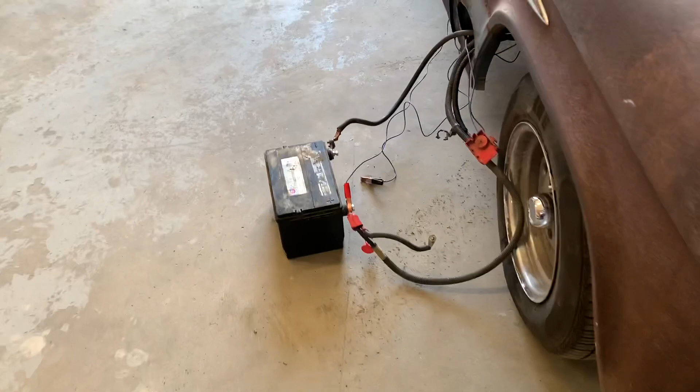I've picked up the tune a couple times, just figured out a couple things. But I just want to do a walk around on what I did, because I didn't skip things, but I was running out of time and I didn't have time to go in depth with it. So what I have is I've got battery cables hooked up to the battery out here. And inside of here I got my fuel cell.

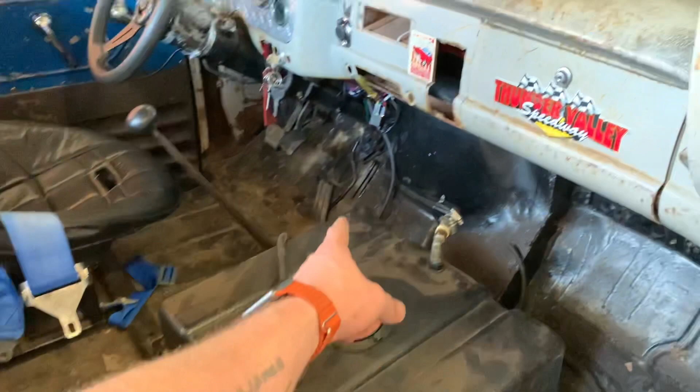Here is a Bosch 044 pump. I'm gonna be running two of these, but for now just idling, one is fine. And here's one of the Evil Energy fuel filters. Comes out of the tank, into the filter and the pump, out to the engine. Now this is very temporary, obviously. And I've got two wires running just outside of here to the battery.

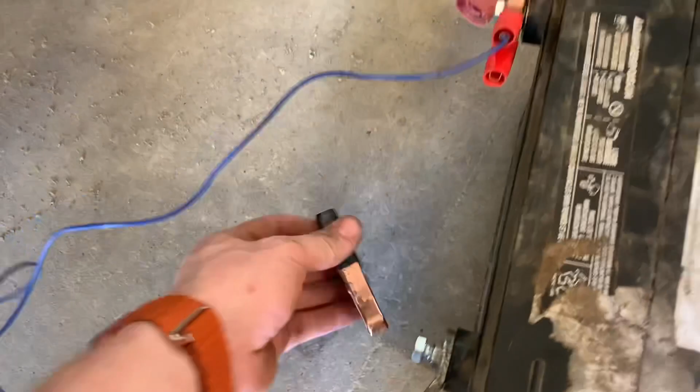And the pump is on a separate, you know, you can hear that. And this is the return here. This is a rollover valve, which only allows air in. It doesn't allow fumes back out, so there's no worries about anything in there. It's just to get it running.

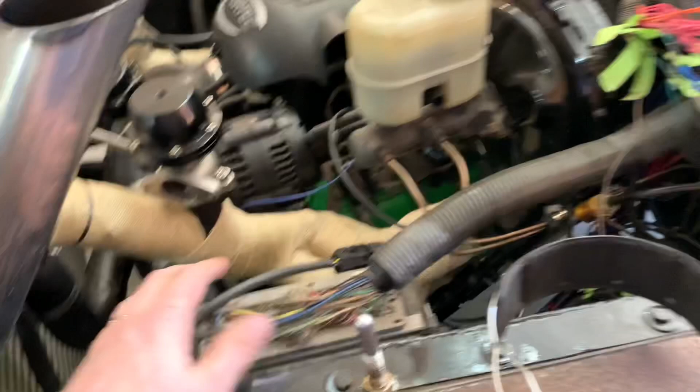And this is the main battery cables, of course, with a distribution wire there going up to the PCM and everything. And the PCM is very temporarily wired in, just two wires to the ignition, and then this one here is to the hot over on the battery. And this is my wideband going into the EGR, so I can log the wideband, which is hooked up right here in the exhaust. And PCM is bolted on, wideband's hooked up.

So I'm just getting to put in the tune here now. I'm reading off the tune because this is my old laptop and my new one is dead and I forgot to bring the cord. So we're gonna go Destroked 6.0. And I'm just going to save that one here. So we're just going to look at the tune a little bit here.

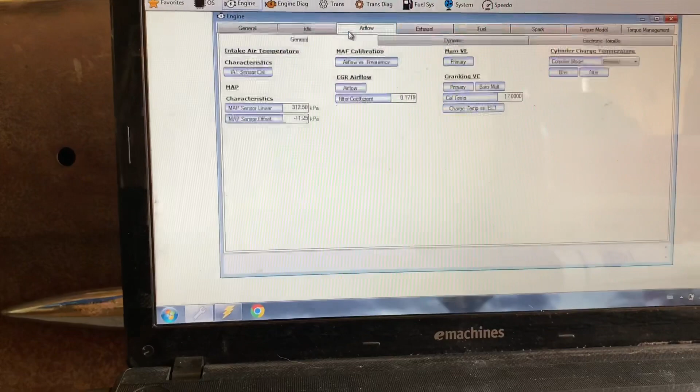I've got the map sensor calibrated. The calibration on the map sensor was wrong. I had 329 point something kPa and like -8 for the offset, and apparently those values were wrong for this map sensor, so I fixed that. That helped a lot. Into my VE, I pulled a bunch of fuel out. This is up around the 50s, but right now I'm still idling in the 70-75 kPa range, up around 800. So I still got a bit too much fuel here.

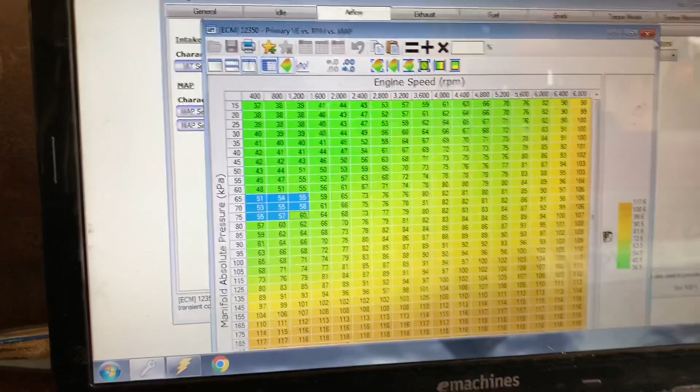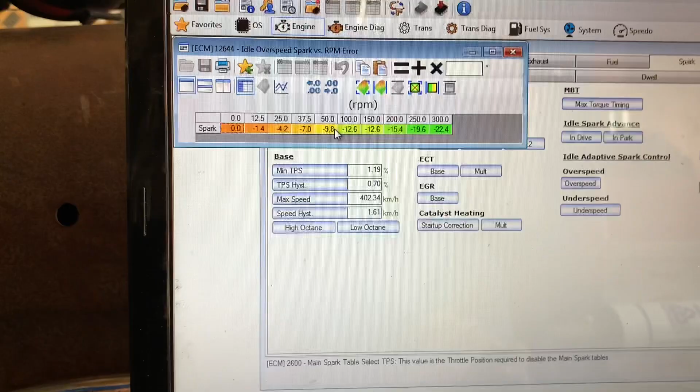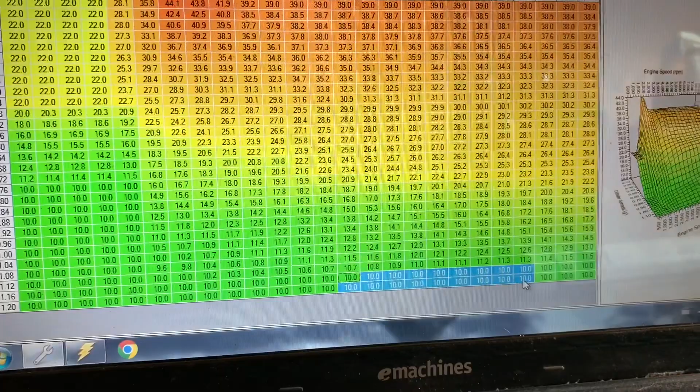What else we got? Of course, power enrichment is done, and I'll be up into like 11.6, 11.5, 11.7 I think. But that's up in the boost. I haven't obviously got up there yet. As for spark, I have my underspeed and overspeed adjusted, so I get a bit more of a crazy idle, and it idles absolutely nuts. My max timing is 10 degrees, because I've always had bad luck with pump gas, anything over 10, 11, 12 degrees, bad luck as in breaking pistons.

So let's get it running and see how it sounds, and see if I can tune it a little bit. This is mostly going to be an idle tuning video, going over some stuff that I have coming. I still have to put back brakes on this thing. I still got to rewire the whole truck, because all the wiring has to be completely changed out. I used a Chev truck fuse block before and it was an absolute mess, and I want to tidy that up. In behind the gauges is a rat's nest. I want to improve it a lot. So there's a lot of that stuff going.

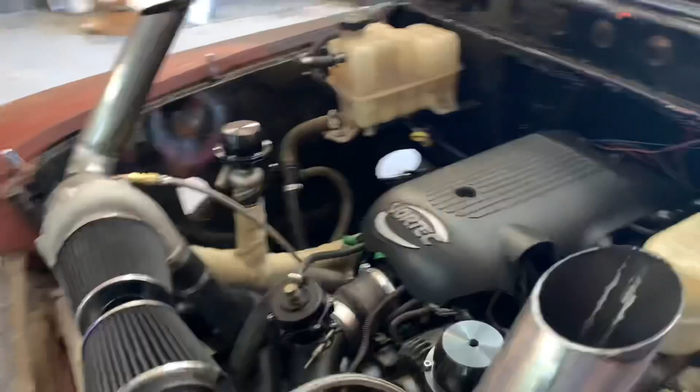What else did I do? I got the coolant, all that done. I think you guys saw that. This is the intercooler piping that I made. It isn't what you call pretty, but it does work very well. I've got the coolant bottle up here in the front with a cap on it.

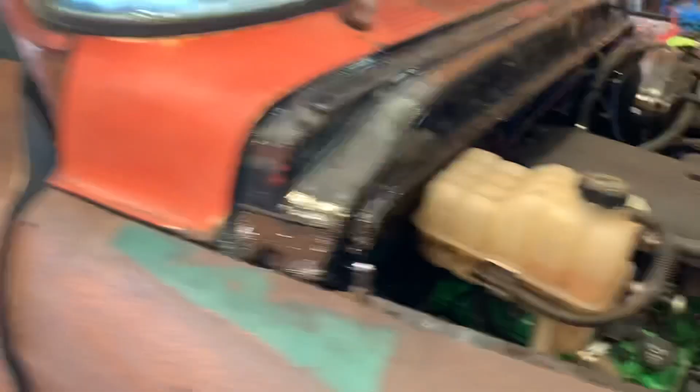And in the back here, I also have a radiator, and this one's cool because it's a van radiator. Came out of a 3/4 ton van, and it also has a cap. So I don't think there'll be any issues running two radiator caps. It'll help me bleed this way better, because I always had air trapped up in the rad. And I'd have the truck up like 4 feet in the air on the ramp here, which is pretty sketchy in itself, trying to get air to come from the rad up to the engine, and that sucked.

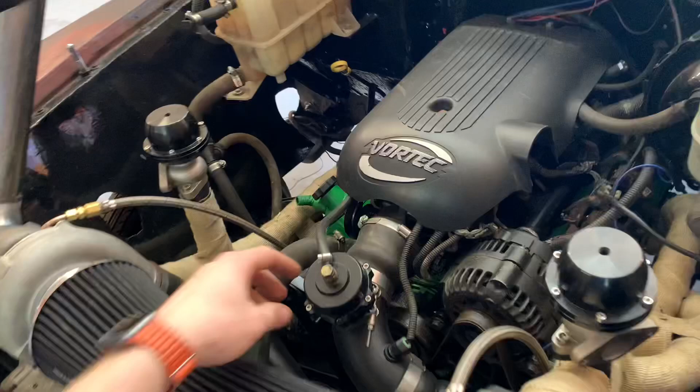So I haven't really heard this blow off valve yet, and I have no idea what it sounds like. I don't know if it's making enough vacuum to open it the way it's idling. So let's get it running and see how it sounds initially.

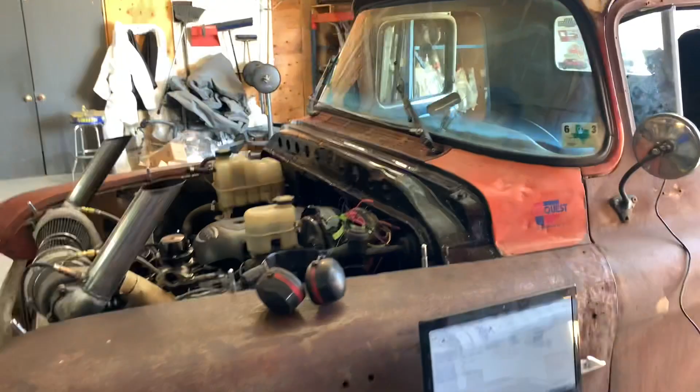First of all, I ain't doing nothing without these, because this thing is loud. Which apparently, after you put a cam in one of these, they get loud.

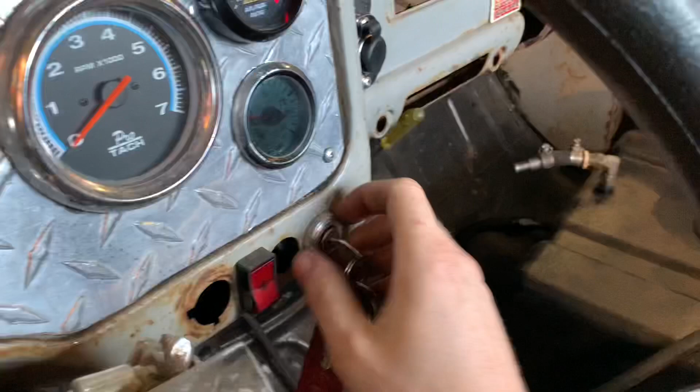All right, so the fuel pump is on. It's just circulating, doing its own thing. I think the key is actually on, so it should read fine. All right, that's good. Oh, that's good. It starts so well.

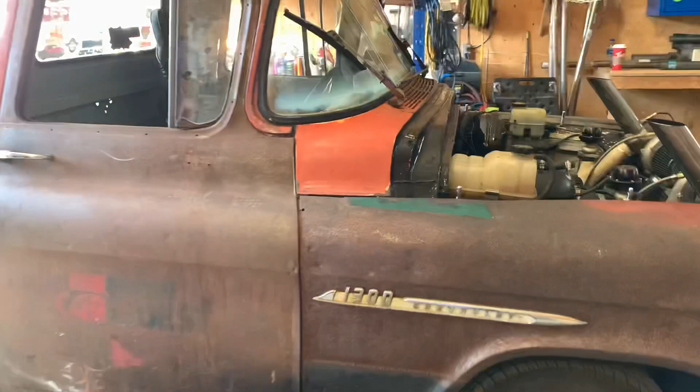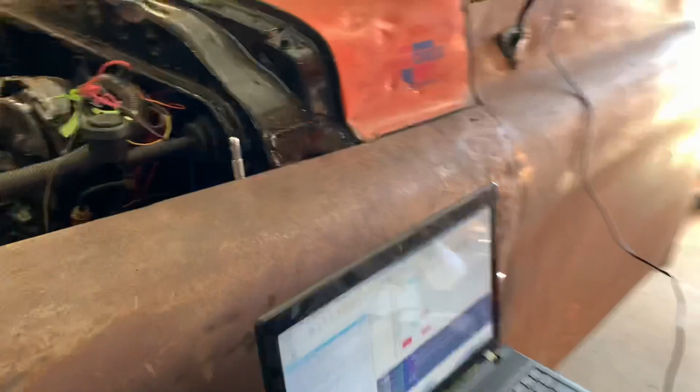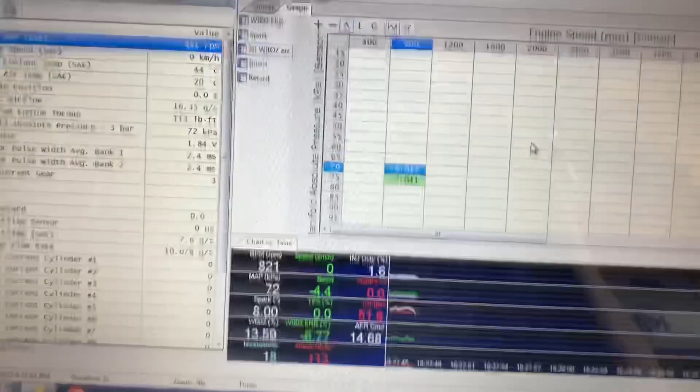Sometimes I get this really lean reading, so I just shut it off, start a new log, and now we're off around 5-6% range, so that's not too bad. 0 spark retard, and we're idling at 72 kPa, which is still too high, but we're right on our RPM range. I'm sorry if I'm yelling, but I really can't hear myself.

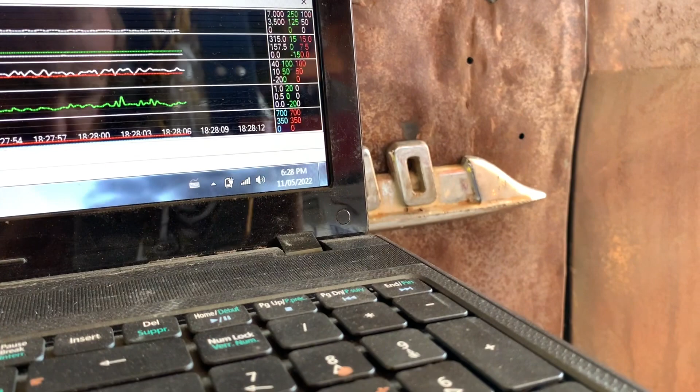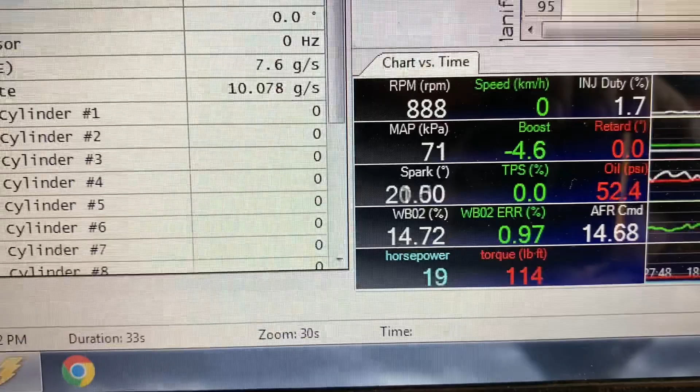Look at this shake. Wow. My spark is dancing around a nice bit. So I'm going to pull some timing out of it and pull out a bit of fuel, because we're idling around 13.6, 13.9, and we want to be at 14.7. So I'm going to take this value and plug it into the tune.

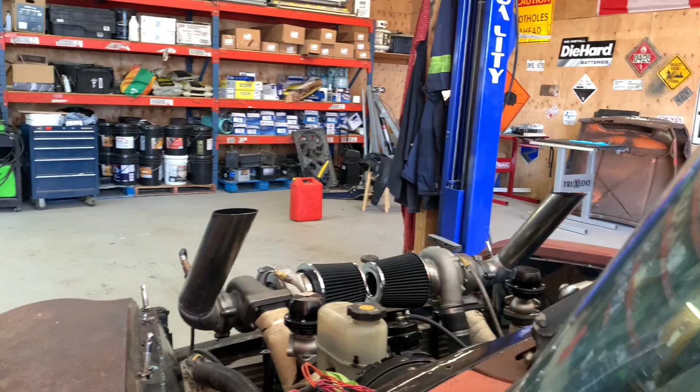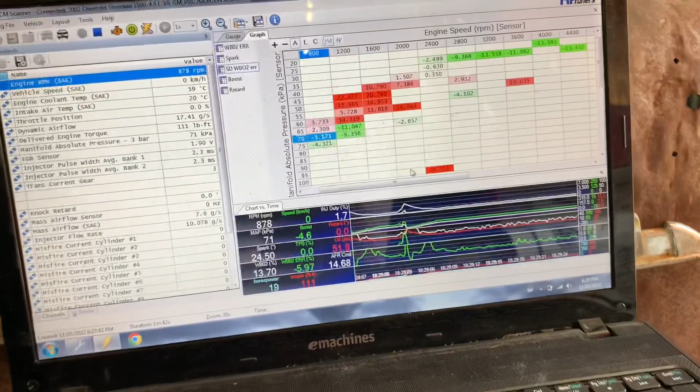I just want to see if I can hit a few more cells. It does even out pretty good, but it does go lean. When it comes back down, off the rev, it's actually not bad. It doesn't shut off or anything, so that's a good sign. So I'm going to shut off the log. And we'll shut off the truck.

So it is running really, really well for how little experience I have with tuning a cam, and I've only made a couple small changes. So let's plug those values back into the tune and see if I can lean it out a little bit. And you can still see that the headers are still smoking off the header wrap. All right, so let's see if we can get some more usable information here.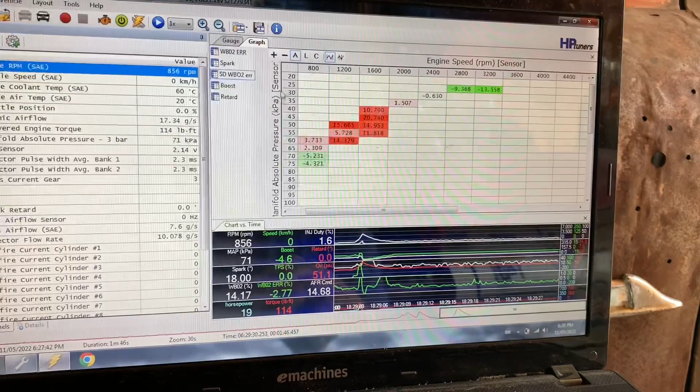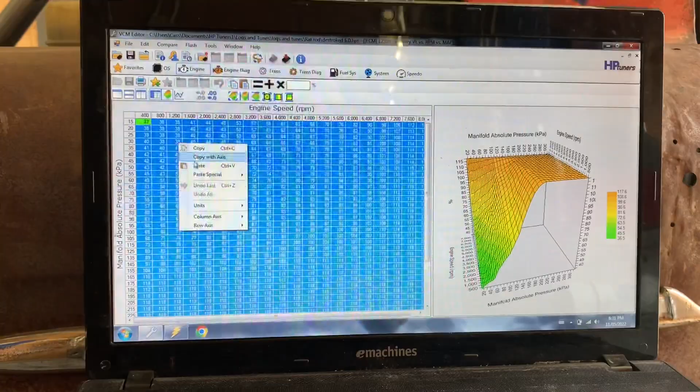So speed density, cell hits required. Let's go 5. Nope, that's too much. 4. Yeah, that'll get us some usable information. So I'm going to copy this whole table, and it's going to change all these values here, because this is where it's starting to go lean on me as soon as I touch the throttle. Let's go back over to our airflow and VE table. Highlight the whole thing, paste special, and let's go multiply by % half.

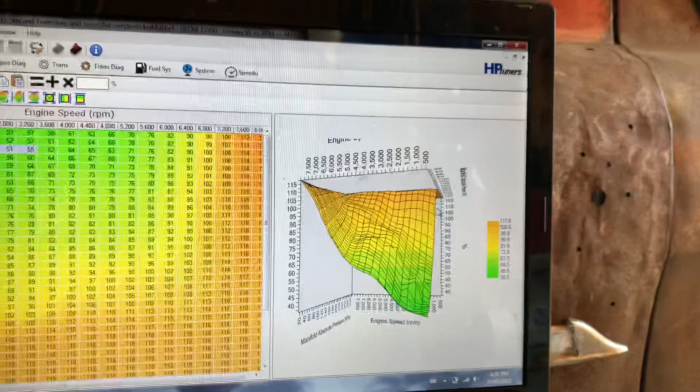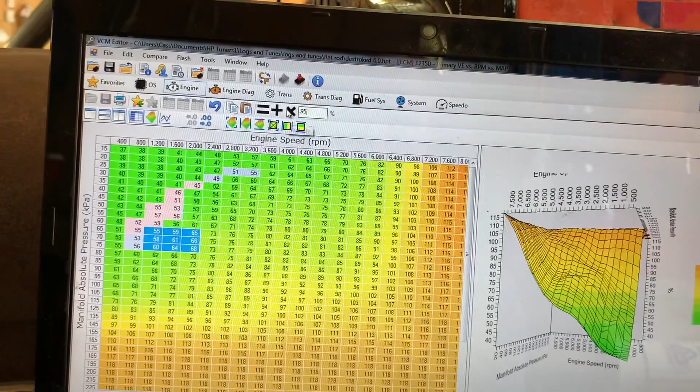So we can see here, these are the values that changed. It took out some fuel here, and we can see that it changed our lower VE right here, and the high spots are what was untouched and the low spots are what had fuel taken out. And I'm going to take some more out of right here too. I'm going to take 5% out here, so we'll go 0.95, multiply, and see if we can kind of smooth this out a little bit.

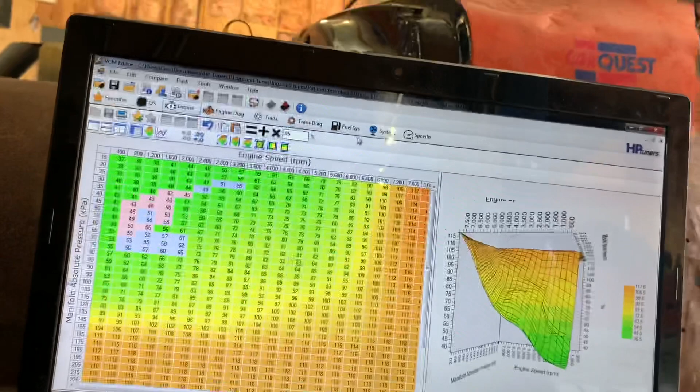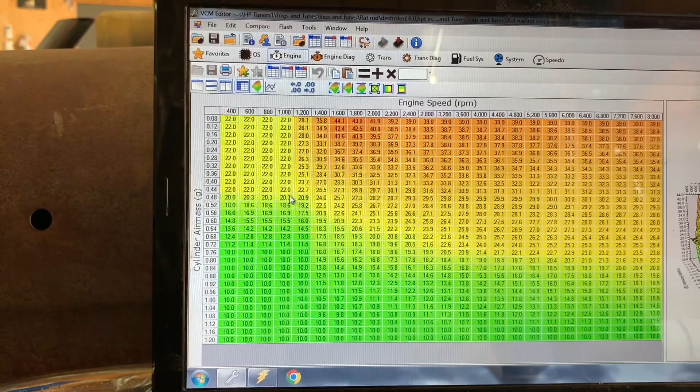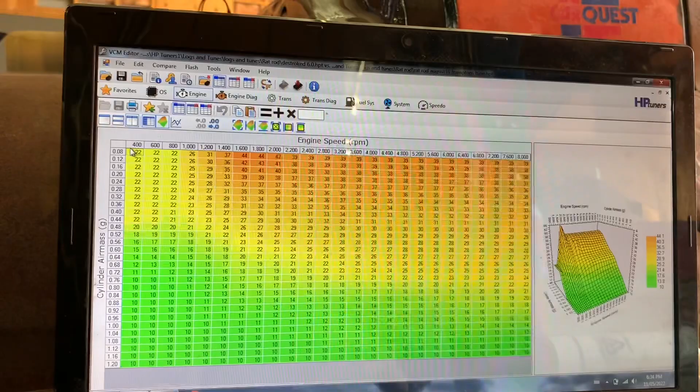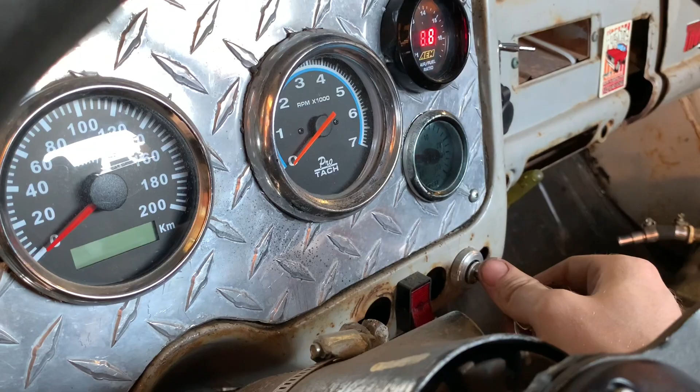And I'm gonna take a couple of degrees out of this one because it's my low octane map and I haven't got that far yet. Take out 2 degrees out of the whole table, and I'll see if my knock sensors pick up on that. All right. Okay, see how it runs now. Oh, she's violent now. See what we're idling at.

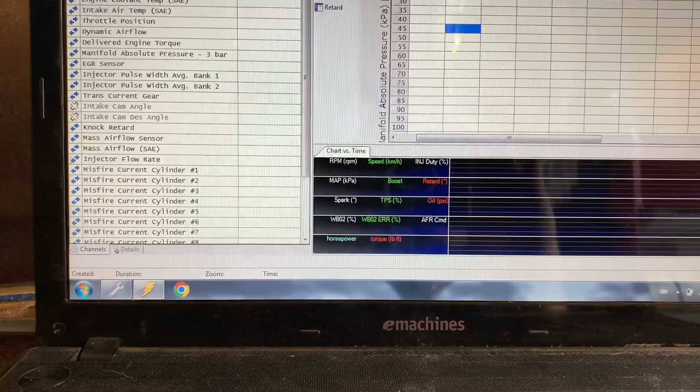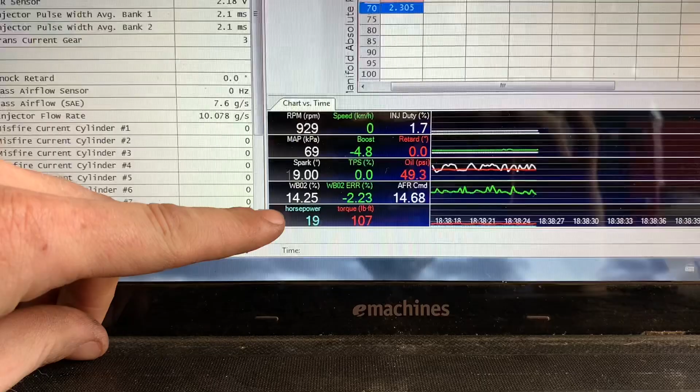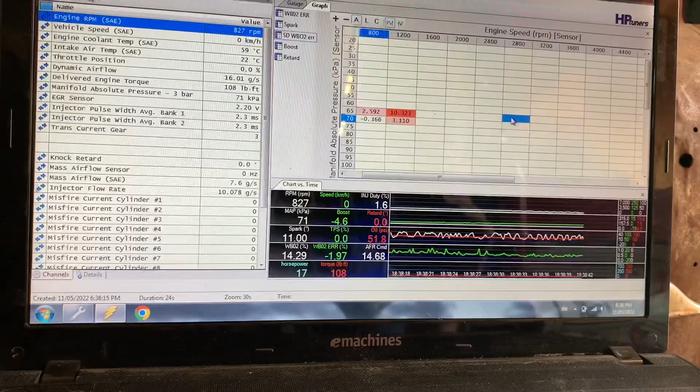So the spark is really freaking out. Wideband, it's actually not bad at all. It keeps bumping 16 every once in a while, which is weird. Let's pull this up. Let's give it 0 cell hits, see what happens. We're still hitting up around 70 kPa at idle. Let's see what it's like on a rev.

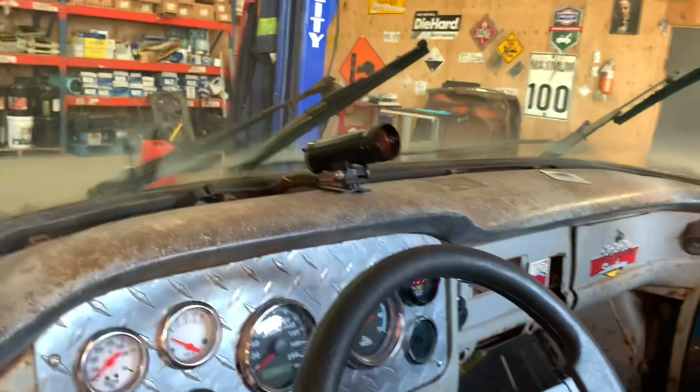Oh, it's a lot more responsive. See if it catches itself. Yep, didn't die out. One more lap now. So we still got a lot of lean. I just wanted to punch it a couple times, but

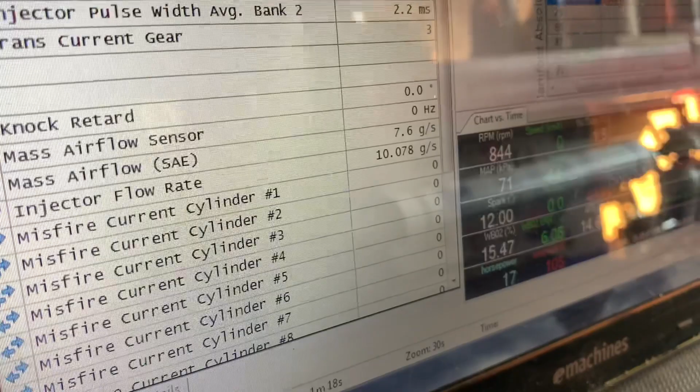wideband is working. Let me see what happens if I put my hand over this so it's not pulling any air down. It's a lot more violent. It's pushing the laptop and everything. Sounds better.

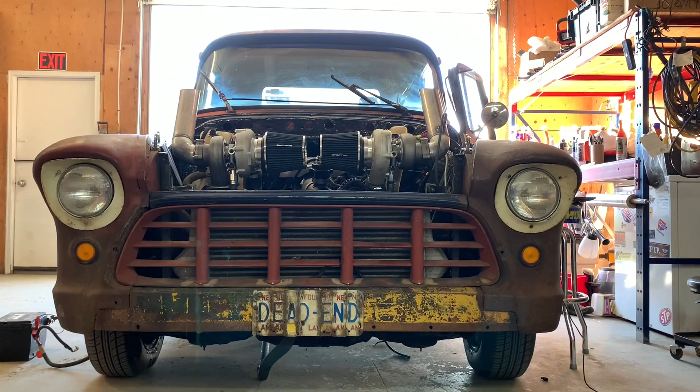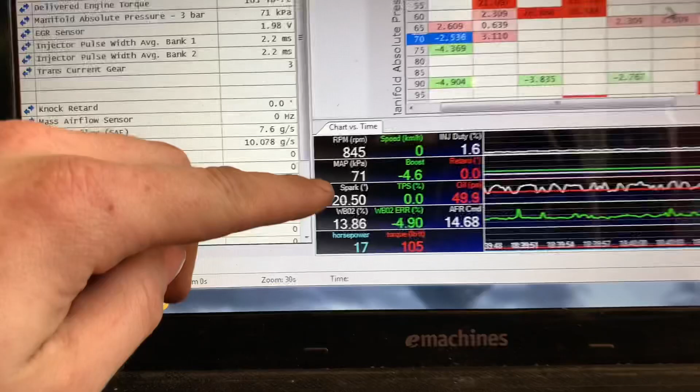Want to get some usable data. It's still idling at like 70 kPa. So is it just what it likes? Maybe. Maybe I'll turn down my underspeed and overspeed and see what it likes, if it goes down more.

It's half steady under wideband now, but it still wants to pull a little bit of fuel out. Big. Doesn't fall off anymore. Good. What do we got? So up around here is quite lean. Now that's just on a bit of a rev, but whatever. Now 34% is a bit much, but if I can get some of this straightened out by the time the first drive comes with a few revs, I should be okay.

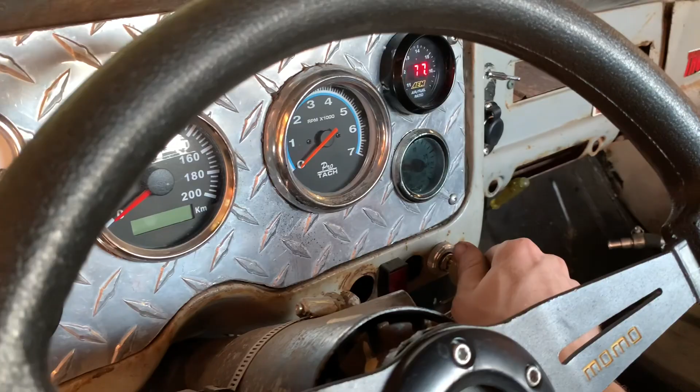So I just watched Randy's video from Lowbuck LS, and he showed a way to try to see what optimal timing is to get the lower kPa value. So I'm going to try to do that. Okay, get it running again. I do like the way it idles. So, record.

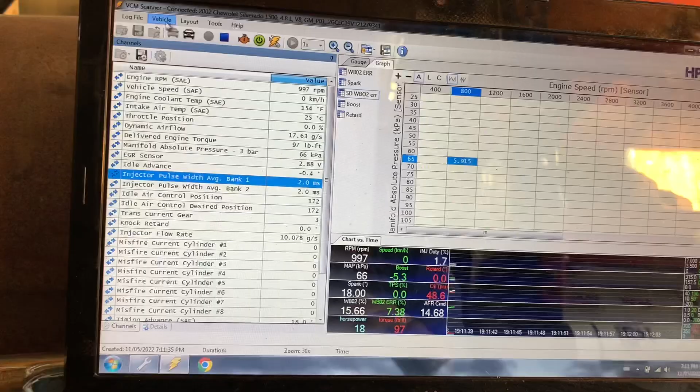Idle air control is at 172 steps. That is a lot. That is quite a lot. Let's lock that at like 60 and see what happens. Oh, it does not like the idle air. Let's see what's going on.

I put a post on Sloppy, and I watched a couple more Lowbuck LS videos, and Randy is wicked at this, so if you're having the same trouble I'm having, watch his videos. And the guys told me to open up the throttle blades a little bit. Don't drill it. I'm not going to drill it. People do. I'm sure it works fine. Some people screw it up, and their stuff runs like trash.

So they said to open the throttle with the key on, logging, open it with the little set screw until you get to 2% throttle, and then do a TPS relearn so that it resets to 0% throttle. That way it's not seeing that you're pushing the gas, and that should allow more air through the throttle blades and hopefully get the IAC steps down. And that way I should be able to tune my base running airflow then.

So I've got my laptop here. I'm going to hook it up to the truck and see what happens. And throttle position is at 0%. Now I'm going to turn my idle screw up until it gets to 2%. So throttle position is at 0.4, 2.4. I'm just going to go up a range until it maxes out, and then I'll come back down to 2% just to be sure it's absolutely accurate. Okay, so we're on 2%.

Now I need to relearn the throttle position sensor so that it reads 0%. So we can see our throttle position sensor is right here. So I need to turn key off. So I'll stop logging first. Then unplug the throttle position sensor and turn the key back on for a few seconds. So I gave it 10 seconds. Now I'm going to plug my throttle position back in again. Turn the key on. And we'll log it again and see if our changes worked.

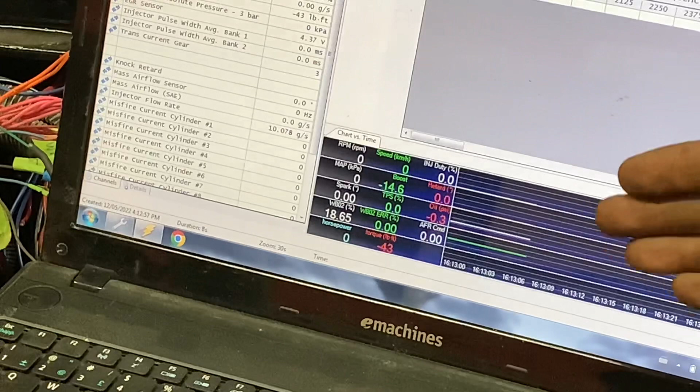And we're at 0%. So that's great. That means the throttle is relearned for 0%. And now the throttle blade is open 2%, which is going to allow some more air in, and the idle air control valve won't have to work as hard to let more air in at idle.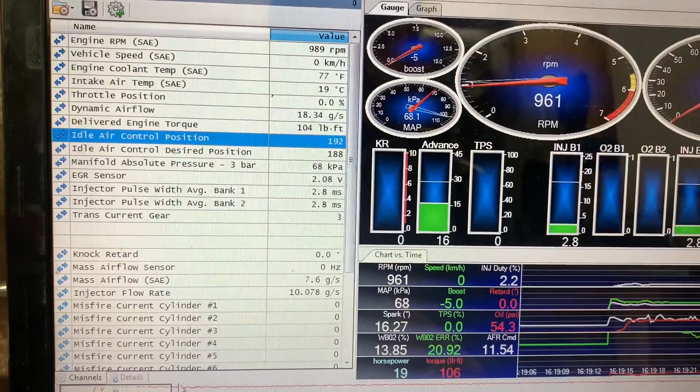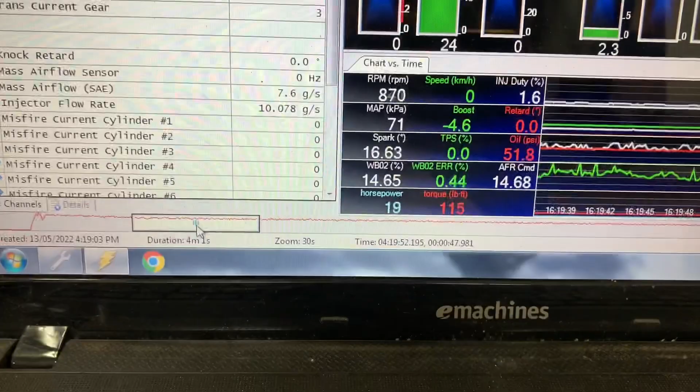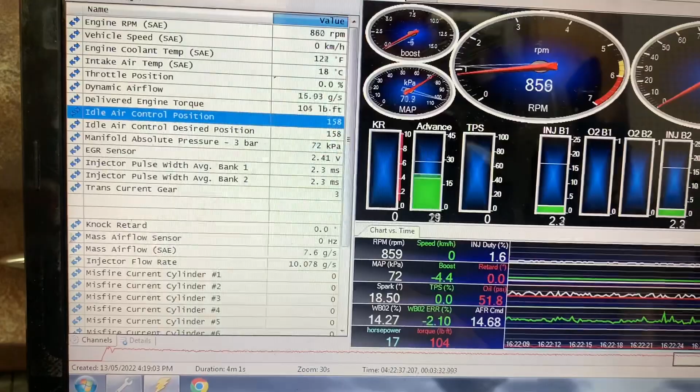So here's an idle log with the throttle adjusted up 2%. I started at 192 actual idle air steps, and I was a little bit concerned, but if we look at the longer that I have it idling, down here is the time, 44, 45, 46 seconds, we can see that the step count is starting to reduce. Now we're down to 167 steps, 165, 162. So we're down to pretty much right around 158, 159, 160, and not quite up to temperature yet. So you can see right here, we're at 131 Fahrenheit. I got a 160 thermostat in it, and I'll be running it around 180.

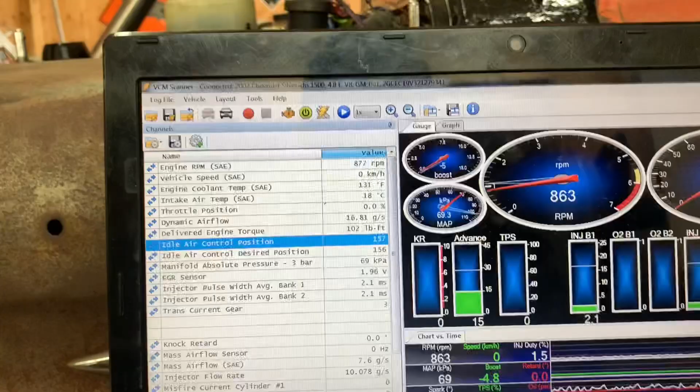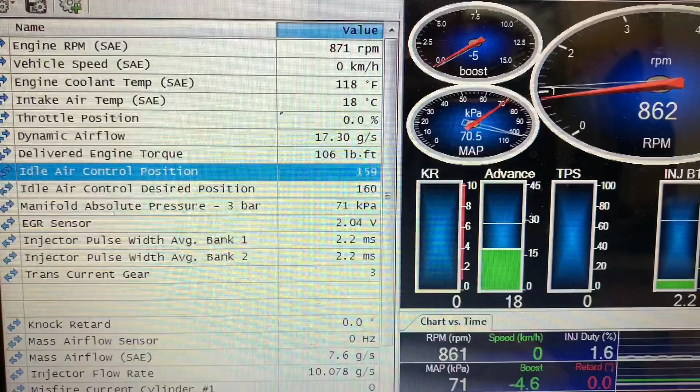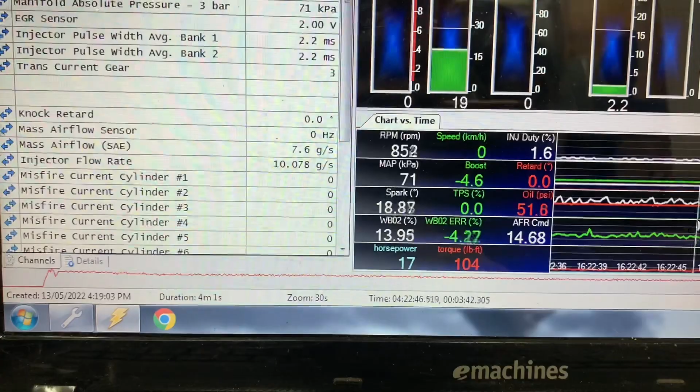And what's our air fuel at? Wideband is down here. So we're at 14, between 13.9. We're pretty much right on 14:1. Go up around 14.5 a couple times. Well, I've got that tune running. Oh, I cannot wait to get this thing on the road. That's going to be super exciting.

I've got to do a harness for a guy named Dustin, and he is putting a 6 liter, 5.3, some LS anyway, into a square body, so it's going to be sweet. So I got to do that for him and a couple more small jobs, so that's going to help pay for this thing.

And well, my next task probably is going to be maybe the wiring. More than likely going to be the rear end, because I have to move that wheel ahead a lot, because we can see that it's not spaced very well in that wheel well, and my drive shaft's too short.

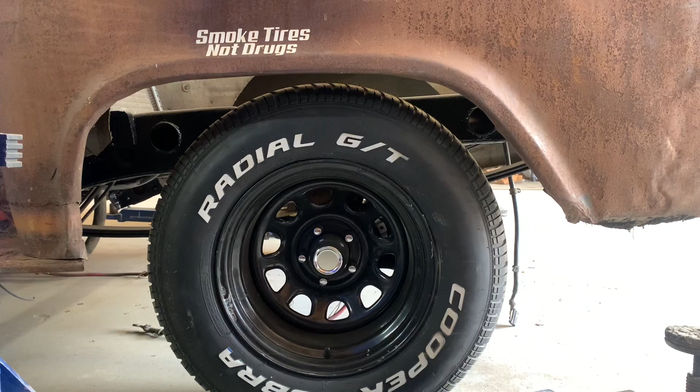So I'm going to take this and move it ahead about 2 inches. That'll bring my wheel about right there, I'll say, and it'll be a lot less of a gap there, and that should work really well.

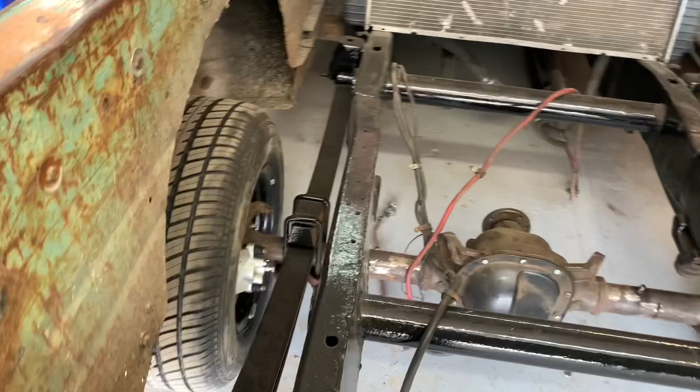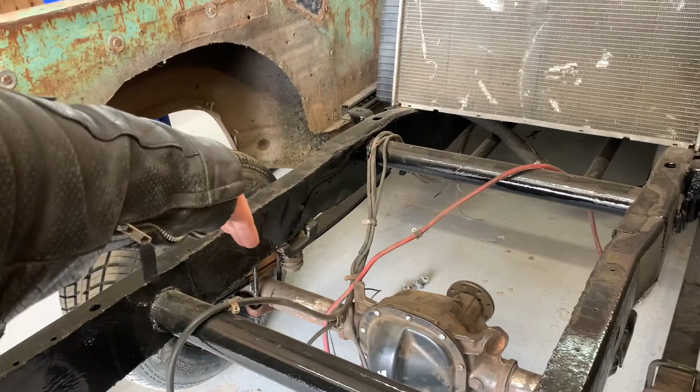I'll probably either end up drilling the center pin hole out in the main leaf, or I very well potentially could make a new bracket right down here and move the hole back a couple inches so that the rear end moves ahead. But I will see. I might ask on Sloppy if drilling that leaf spring is a good idea. But yeah, getting really, really close.

I think I'm going to put my fuel cell in under the bed floor and just cut a hole where I can pour gas in, take the cap off, that kind of thing, because I want to do a wood floor in this so I can take the motorcycle and stuff, and it'll be a lot easier not to have to drive over a fuel cell and not risk knocking the lines off of it or anything like that.

Well, I'm still trying to get my head around this, and it seems to be idling okay-ish. I think it actually idled better before I started messing with it. The curse of being me. So I do have the original tune on my laptop that worked really well. It started well, it didn't flare or anything, which this one does. It starts up, it goes whoa, and it comes back down, and it seems to even it a little bit.

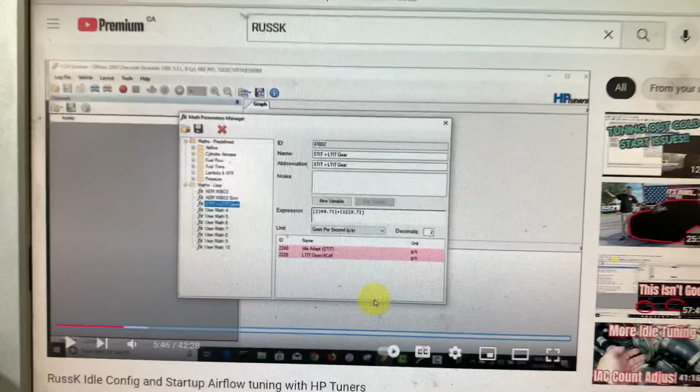But I'm gonna try to do my base running airflow now. And I'm watching RussK's video from Lowbuck LS, who's been a great help so far. And I'm gonna set up a histogram, which right now I need to do the math, so that I can tune my base running airflow. I'm actually gonna go like that right now. So this is the parameter that I need to do.

I need to go idle adapt, short-term idle trims, plus long-term in gear with AC off, which doesn't matter because I'm only using a manual transmission. Engine isn't ice cold, so it's not going to start down here in the minus 40 Celsius section. It's probably going to start up around 20-ish, maybe a little bit higher, and then I'll let it idle and it'll work its way up.

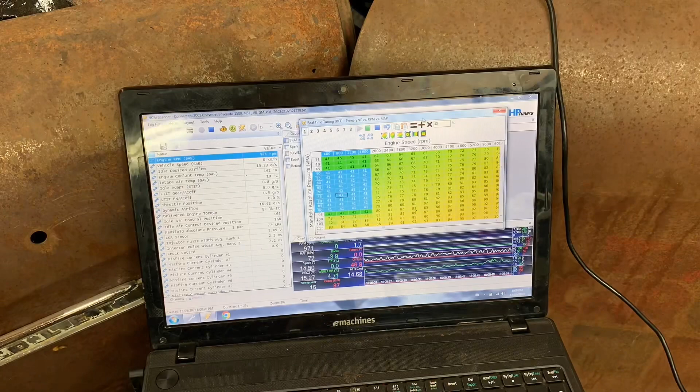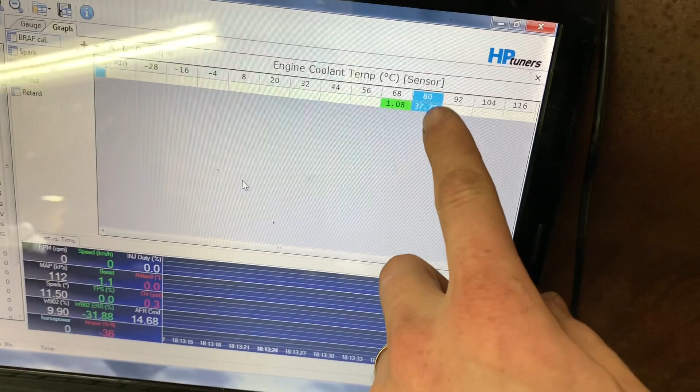Well, apparently I'm getting some data. The one was before I made the change that got this correct, because apparently the engine sees park when there's nothing hooked up to the transmission. And I had it on in gear, so that didn't really get me any useful data at all. But I think it might actually get me some data now. So I'm going to get my head around this a little bit more. I'll cover it after in another video, because I'm just having a really hard time getting it figured out.

But I think I might go back to my other tune where it started up really well, it idled well, there was none of this lean pop going on. So I'm gonna shut it down here before I confuse everybody as much as I'm confused. So I did get a lot done. I got it to start and idle, and it's not surging or anything. And I'm starting to learn the idle tuning a little bit more.

I have a lot more to learn before I go and show you guys and end up showing somebody something wrong and destroying their engine or making it worse, as somehow I did to mine. But, you know, I'm still learning. I'm absolutely not a tuner, but I will figure it out. So I'm gonna shut it down here and go home and try to get the smell of fumes out of my clothes and my hair, my beard, all that. It all smells like 11 to 1.

So we got it running. That's the main thing. The engine runs. It has to improve a lot, and we will make it improve a lot. But this is, for now, the only engine running video, because I got a lot more work to do. I've got wiring, I've got rear end stuff to do, I've got to put floor in the pan, I got to put a seat in it yet, and that'll all come very soon.